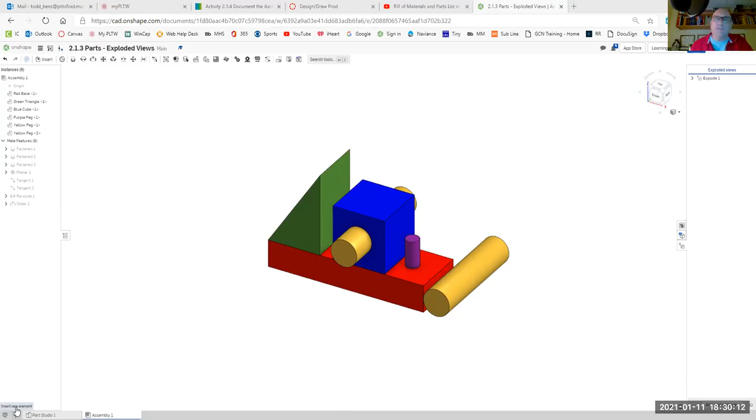So let's get started. First, I'm going to go down to the plus sign in the bottom corner and click on it. I'm going to hit create drawing, select my template, and give it a second to open up. Once that opens up, I'm going to go to the top left and select insert.

I'm going to pick my first part, the red base, and start off with that. I'll put my front view in, slide up and put my top view in, click on my front view again, slide over and put my right side view in, then click on front view and put my isometric in. We'll hit escape to get out of that.

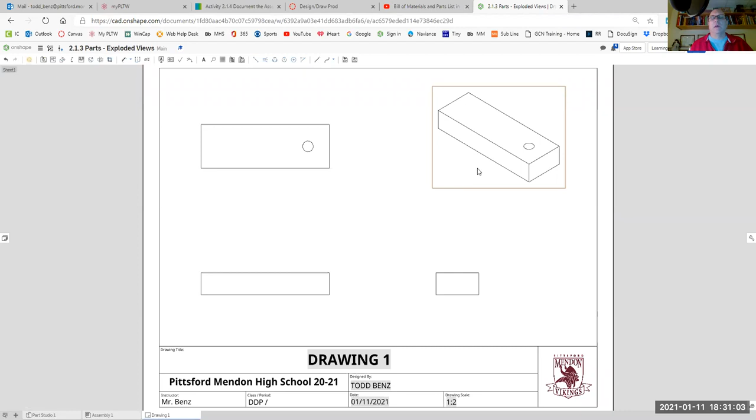First thing is I want to color my isometric, so I'll right click on it and show shaded view. Next I can see that I have a hole, so I want to right click and show hidden lines.

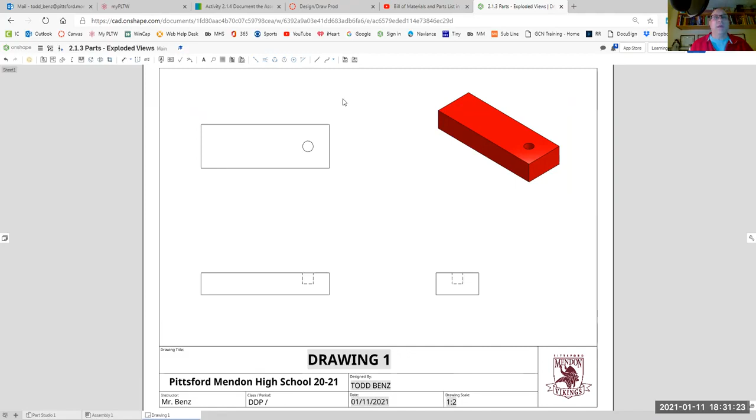Next I want to make sure I get my overall height, width, and depth. So let's go into dimension. My overall width would be right here, my overall height I'm going to put right here, and my overall depth I'm going to choose this line up here - I'll explain why in a few minutes.

Next, I can see that I have a hole, so I want to get my center mark and place it in there. I see that I have some hidden lines, so I need to get my center line. I'm going to grab center line, click on that edge, click on that edge, click on this edge and this edge, to get my center lines in.

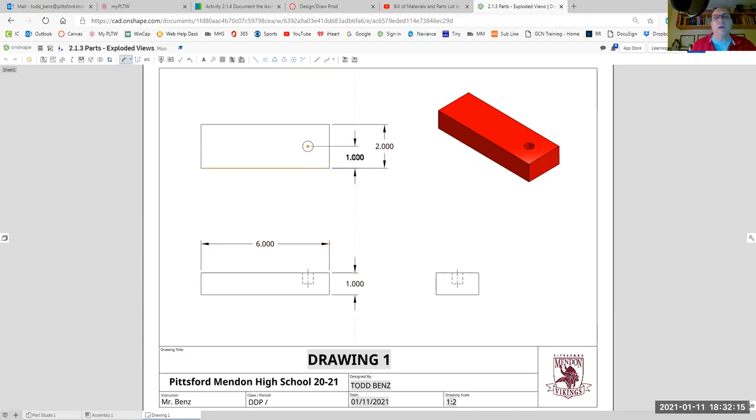Now, the next thing on our checklist is to always dimension a hole up and down, left and right, and correct size. So let's do that since we have a hole. For up and down, I'm going to go from the center of the hole up or down to one of the lines. I'm going to go down and put this one in, trying to line it up with the one right below to keep my drawing neat.

Next is left and right, so I'm going to go from the center over to this side and put that one in. The last one is correct size, so I'll grab the outside edge and come down here, lining this up so it's all looking nice and neat. Those are all the dimensions I need for this drawing.

Now, I noticed that I had a couple other parts in my assembly. I don't want to keep going back and creating more documents, so I want to come over to this little icon on the left edge called Sheets. I'm going to click on that and it opens up, and you can see that I have my first sheet here.

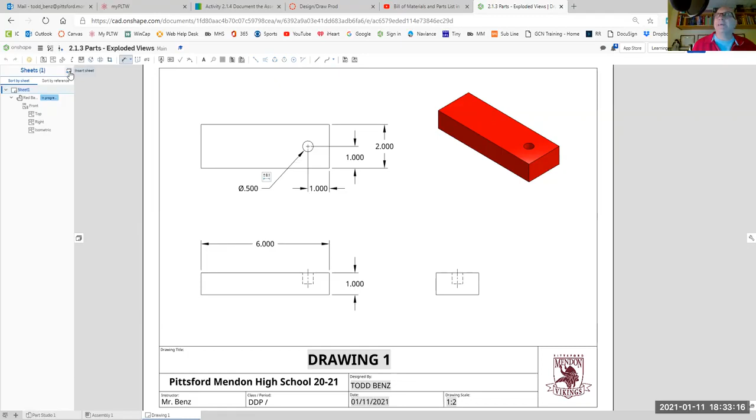You can see there's the red part - I've put the front view in and all my other parts are associated with that front view. I want to create some more sheets, but like I said, I don't want to create more documents; I want to keep everything condensed. So I'll go up to this little icon called Insert Sheet, click on that, and it will just make another sheet inside of this one.

So now I'm going to go and insert again, and I want to grab a different component. This time I'm going to grab my little green triangle and put it down here.

I'll come back up and put my top view in, and put my right side view in. So I'll click on my front view and put my right side view over here, then click on front view again and put my isometric view.

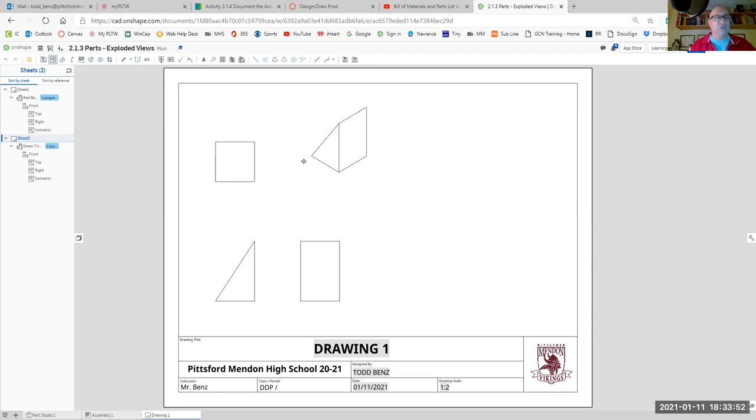Now I know I didn't spread it out because these are small parts, so I'm going to show you what I'll do since they're small - I'll try to put more than one part on a drawing, which you are allowed to do. So let's hit escape, right click, and let's shade that in. Okay, I don't see any holes.

So let's go into dimension. I need my overall height, width, and depth. For overall height, I always like to grab my front view and put that in. My overall width is going to go from one side to another.

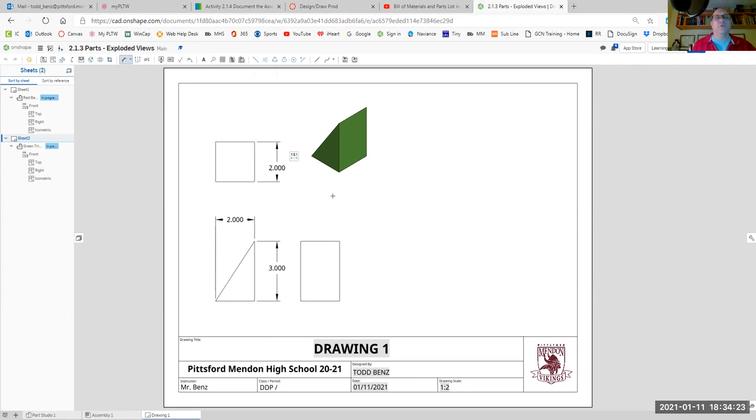My overall depth is going to be right here, and I'm going to try to line that up with my height, which I did. So that's looking pretty good. We'll hit escape. Maybe I'll just slide that up just a hair so it's right in the center. I like that pretty good.

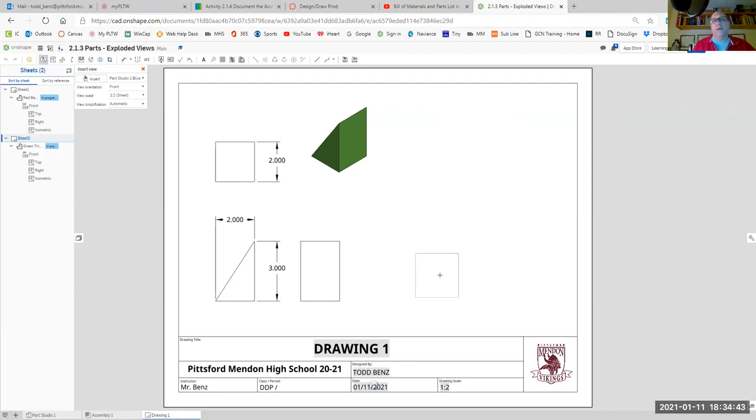So now what I'm going to do is go back to insert, insert again, and this time grab my blue part. I'm going to put it over here because I have plenty of room. I'll put my front and top view in, click on my front, then put my right side view in.

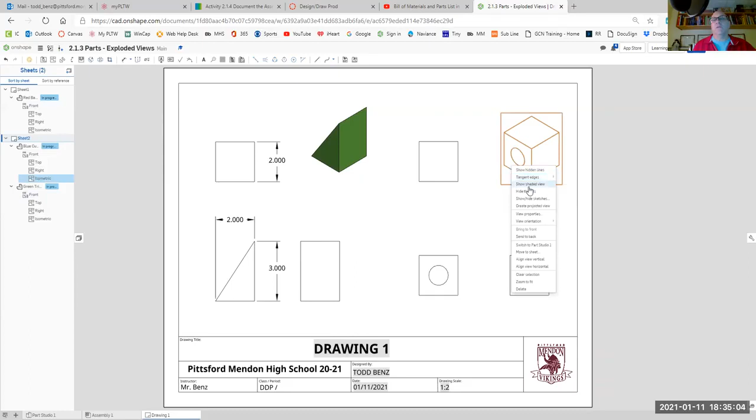And then I'll click on my front again and put my isometric view in. I'll hit escape, right click on my isometric view, show shaded view, and color that in. Oh, I got a hole again, so I need to come up to my views, right click, show hidden lines, right click, show hidden lines.

My overall height, width, and depth - let's grab those. My overall height, I'm going to grab right here, we'll put that in. My overall width, I'm going to grab right there, actually slide it up a little bit. And my overall depth, I'm going to show right here.

Now, since I have a hole, we need our center mark, which means I also need my center lines. So I'll click on the hidden line, hidden line, this hidden line and this hidden line. We'll put our center lines in. What I'm going to do is slide this one over just a little bit - I just want a little bit more room right here to put this in.

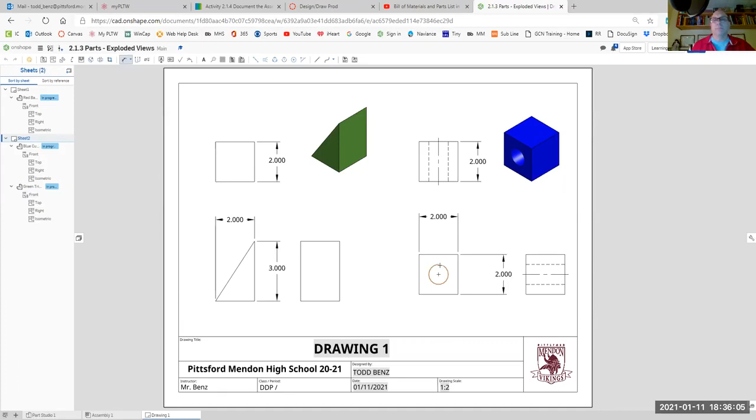So now I have to locate my hole, up, down, left, right. Let's go back to dimension. So I've got to go from the center - this time I'm going to go to the top edge. I'm going to put that in, line it up with the edge up here. I'm going to go from my center over to my edge over here and line that up. Maybe I can get in there - yeah, I think I can get in there.

So it looks good, and the last thing is I need my overall size. I'm going to see if I can grab that - yep, that looks pretty good. I'm going to plop that right up in there. I could, if I wanted to, have brought this down lower, maybe would have cleaned it up a little bit better. Let's see what it looks like. If I grab this, let me see if I can bring it down a little bit. I know this is one of the rules you don't want, but this might be a little bit cleaner than showing it up here. Either one would be totally fine.

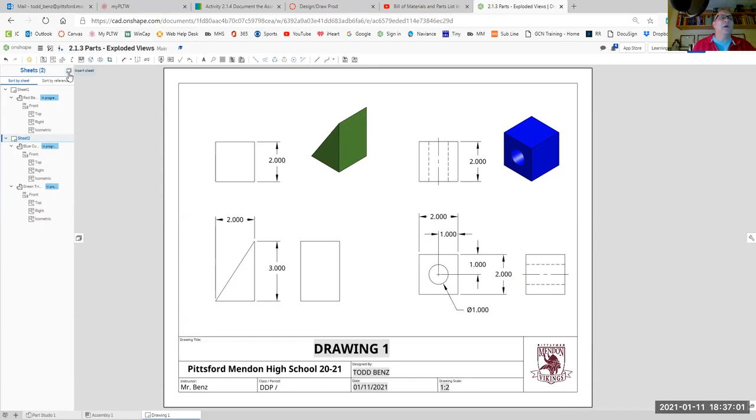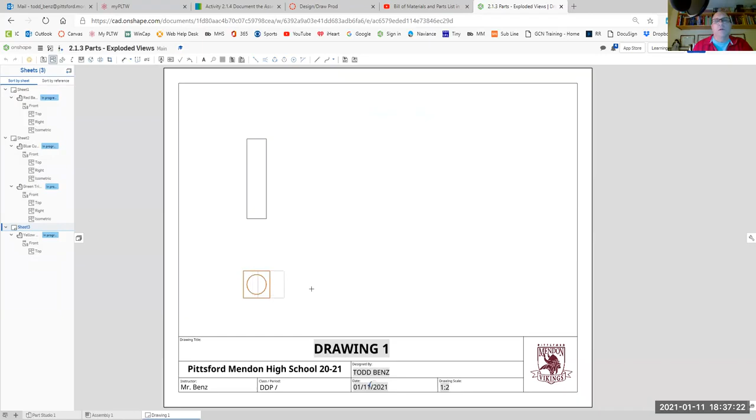I'm going to go back to my insert command, select insert, grab my yellow peg, and bring my yellow peg down here. I'll bring it up on top. I could click here - this is going to be pretty much the same as my top view. I really don't need it, but I'm just going to do it just to show you. And of course, we need our isometric view right there.

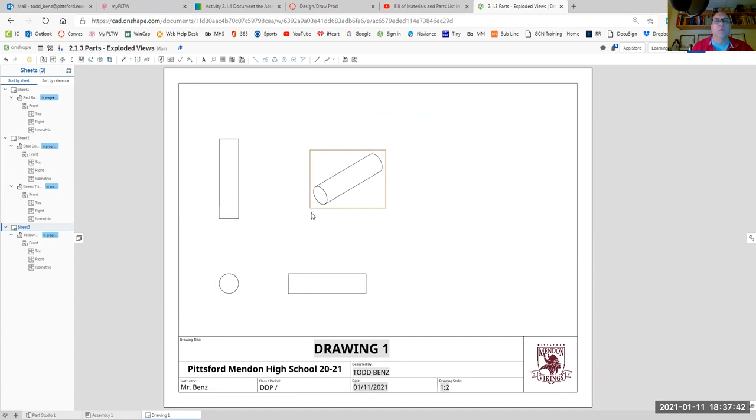I'm going to hit escape. What I'm actually going to do is slide this over a little bit so I have more room, and we'll slide that view over a little bit more, and bring our isometric view down. All right, let's dimension - actually, let's color this in first. Right click, show shaded view. I don't see any holes, so let's go right to dimension.

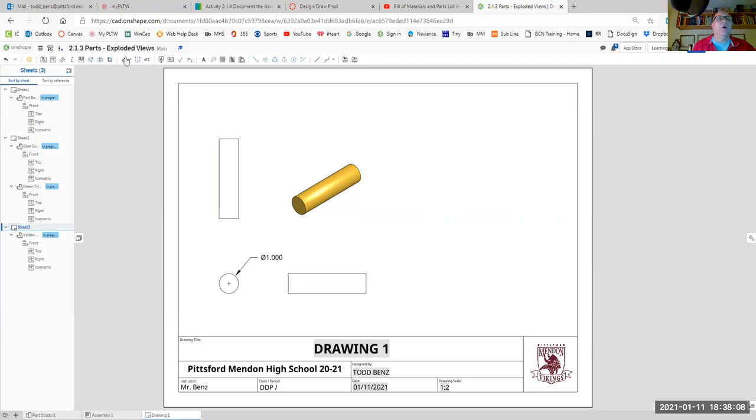We do need our center mark since it's a round object. Let's go to dimension. On this, I only need 2 dimensions, so I'm going to need my overall diameter right there, and I need to know how big it is. I could do this on the top view, or I could have done it on the right side view - I'm going to put it on the top view right there.

I'm going to go back to insert, insert again, grab my little purple peg, bring it over here and plop that in. I'll get my top view, click on my front view, put my right side view in, and again click on my front view and pop in my isometric. Hit escape, right click on this view, let's show shaded, and I'm going to repeat the steps.

So we'll get our center mark, put our center mark in there for the purple one, and I need 2 dimensions - one showing me my diameter and the second one showing my length. And escape. So this is all I need to do to show all the different parts when I have an assembly. I hope you like the first part of the video.